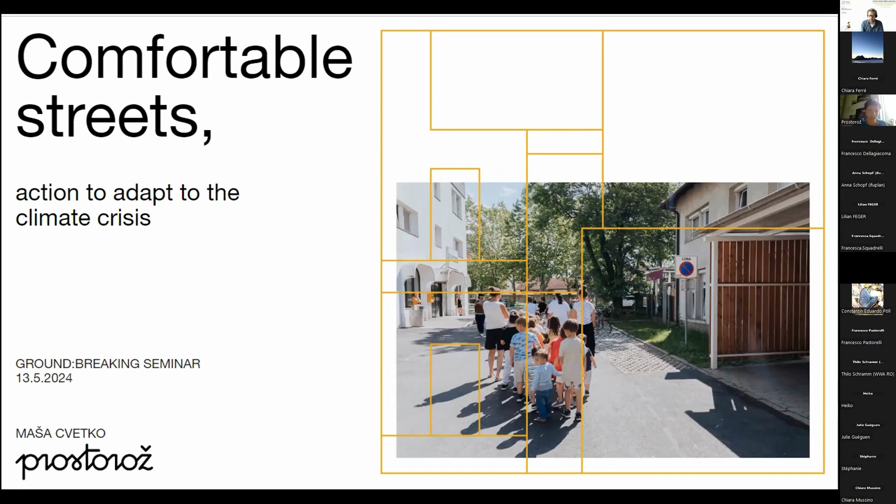It's a concept similar to different typologies of streets that we know from other cities. But what is common for most of these streets is that usually traffic is not really prohibited there, but on the other side, the social life is very intense, so as a pedestrian you feel very safe and comfortable there.

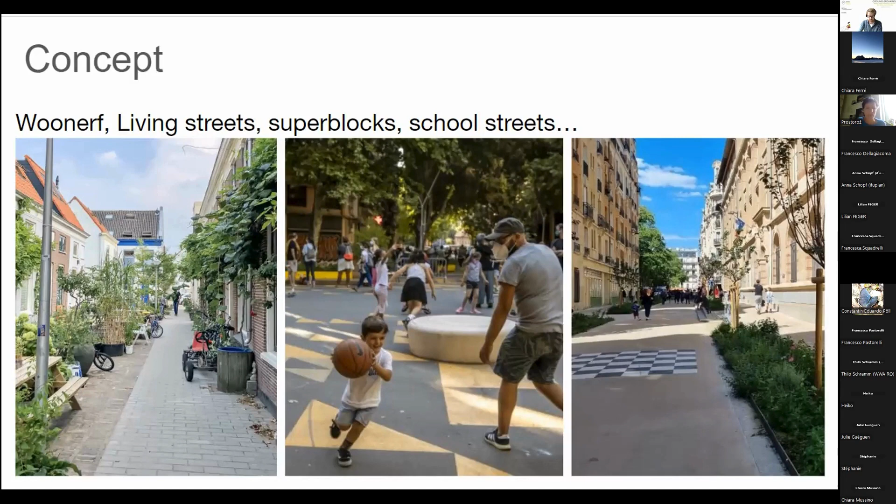You see that the pedestrian is in the first, secure position. So we also put together some criteria for how to plan this kind of street, which I will show through these 2 projects. I will not explain them now, but you will see these criteria.

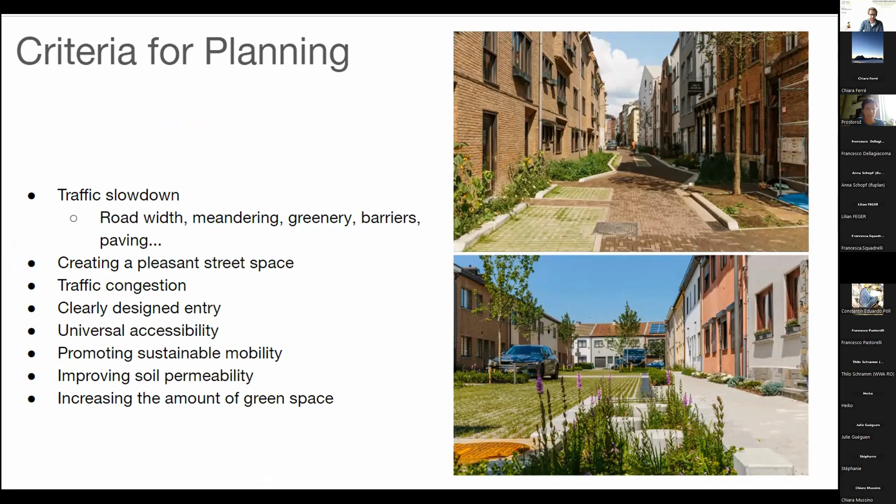But to go a bit back, maybe just to explain how we came to this project or this pilot - as an NGO, most of, or half, maybe more than half of our projects are also financed through different tenders, a lot of them European, but sometimes also municipal.

This project especially was our response to the call from the municipality of Ljubljana, where they were searching for ideas on how to respond to climate change adaptation, so for different kinds of actions.

Our first idea was actually - because it's not a big budget - we wanted to make more of a raising awareness campaign where we would ask people to change 1 parking lot for a green space.

But then when we were going deeper into which kind of suitable spaces would be the most appropriate, and which people to ask to be involved, we realized - because it's such a small area, 1 parking lot - we were also asking ourselves, where would such a small green space make any sense?

Because maybe on a large street full of parking, one green space doesn't mean much. But then on the other hand, if you look at the entrances of different public buildings, we realized that kindergartens are maybe one of these spaces where it really makes sense.

So we went through the analysis, first of all the locations of the kindergartens and what kind of accessibility is there. And we realized that the situation is many times quite alarming - some kindergartens don't even have a sidewalk in front.

At the time of morning arrivals and then departures, parents who bring children by car park really just in front of the entrances, so those children who come by foot sometimes cannot even access it, or those by bike - the bike racks are parked all over.

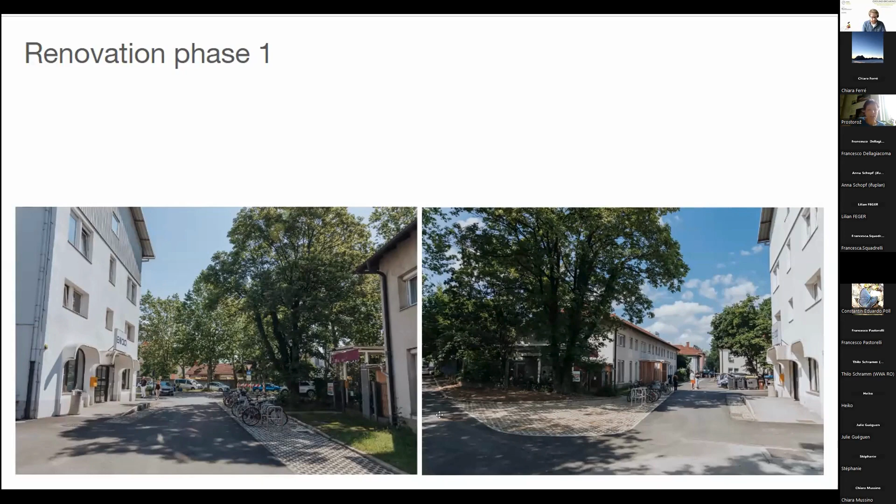So we still needed to do observations—how people come to the kindergarten. There is a post office also on the other side of the street, where people walk, where people leave cars, and what the timings are. So this, in a way, we could do during this summertime.

We did observations, interviews, and questionnaires with parents and with teachers in the kindergarten. On the basis of this, we saw what they wanted, what they preferred to have—more green spaces, more equipment, or whatever. And on the basis of this, we created implementation plans.

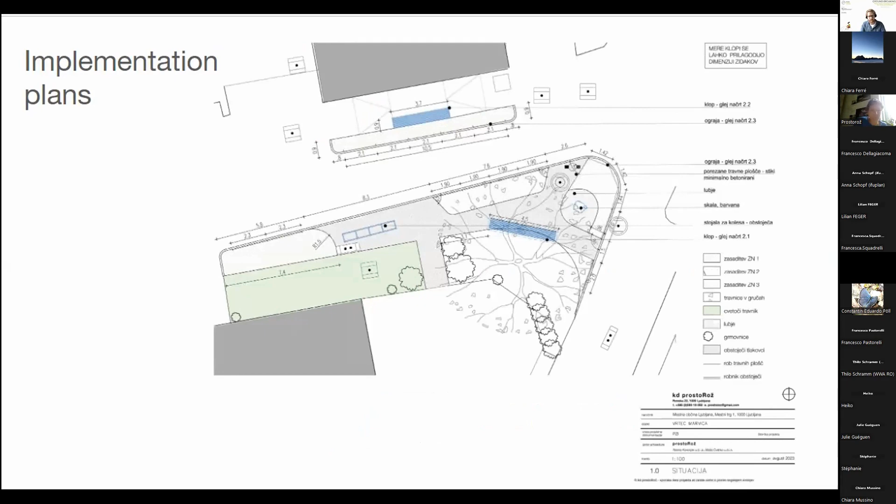And then in the autumn, the implementation also happened. More than half of these pavers were removed, and we planted almost 500 plants. Children were also collaborating in this action. From these pavers, we created two large benches, one for the kindergarten and one for the post office, and we put in bike racks. That was actually all we finished with our budget.

So how we dealt with this project, going through the verification criteria for comfortable streets: we tried to slow down the traffic with widening and narrowing the traffic road, adding greenery. Then we changed the traffic regime. The entrance of the kindergarten was also exposed now, with a bench and bike racks, etc.

We went through this, and we also encouraged sustainable mobility, so it was more pleasant now to come to the kindergarten by walking or biking. And with more permeable paving, we improved the soil permeability, so in case of heavy rains, the water goes directly into the soil.

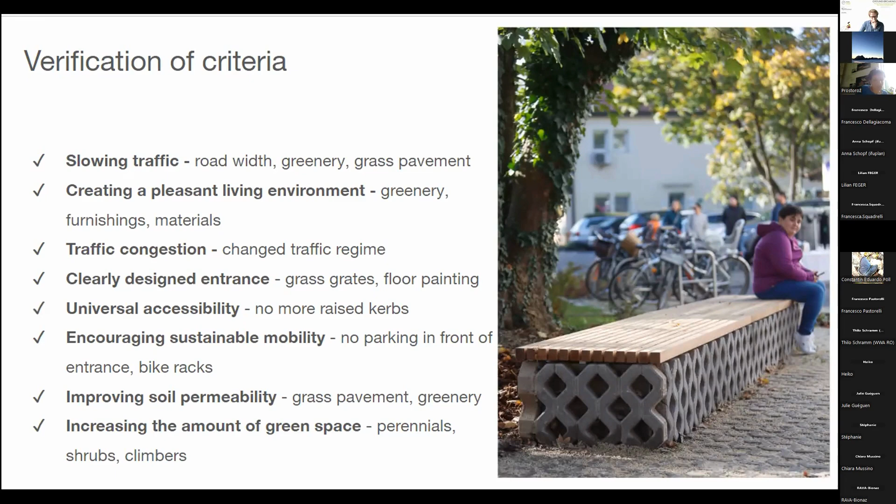This was, okay, one more thing. So what we were not expecting, and it was quite shocking—we realized this situation very, very soon, even before the opening.

So to protect the plants, we had budget only for a very low fence, which was red with red ropes. We hoped that people would see this and that it would be enough. But unfortunately, we did not take into account this kind of driving culture. We are still fighting with the municipality to make a proper fence that will protect these green areas. They are now willing to do it, but it takes a lot of time.

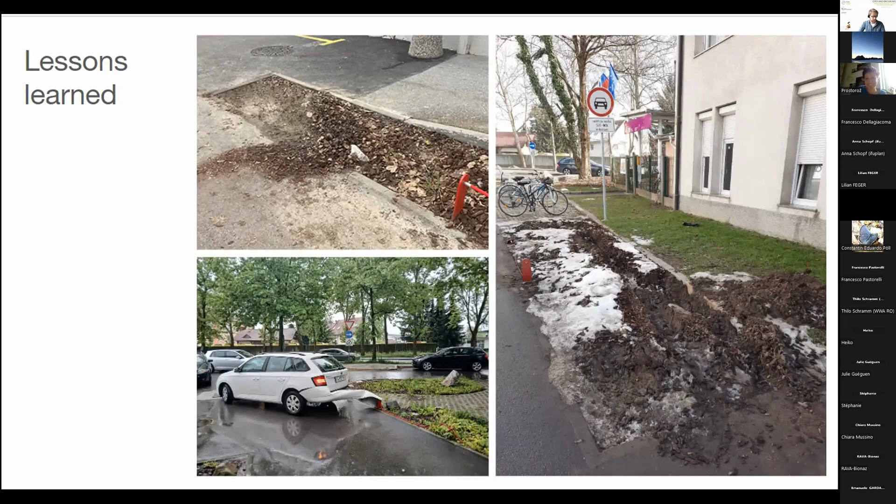So for us, and maybe also for any planners in the audience, this was a very good lesson—to put a proper fence to protect the plants.

This kindergarten, for which the municipality agreed to order implementation plans, was also one kindergarten. You can see this is the entrance—it's again very inaccessible. In front there are full of cars, bikes, and planters. Also on the street, even though it's prohibited to park on the whole street, you have cars on both sides.

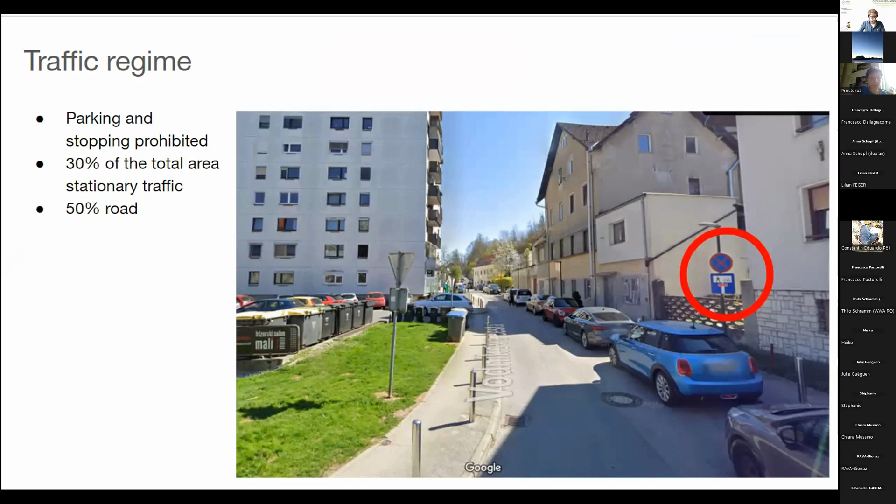80% of total this area is covered, even by cars or by road, which is the same traffic surfaces. So this is the current situation.

So we have only 3% of green surfaces, this small piece of grass. Pedestrian surfaces are 20%, even though people are already now walking in the middle of the street because it is not possible sometimes to access the trottoirs. And the same with water permeable as green spaces.

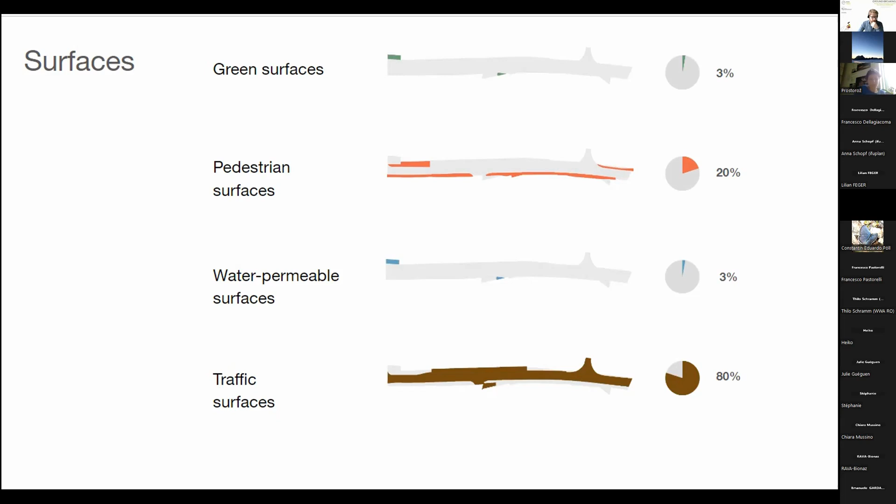So what was our project? The first thing was to remove everything, all the surface layer, and dig as deep as possible. So at least 80 centimeters in the areas where we will put the green surfaces.

So as Chiara was explaining, this was for the reason to improve the soil permeability. And then everything was put on the same level so that there will be no more barriers for pedestrians or cars.

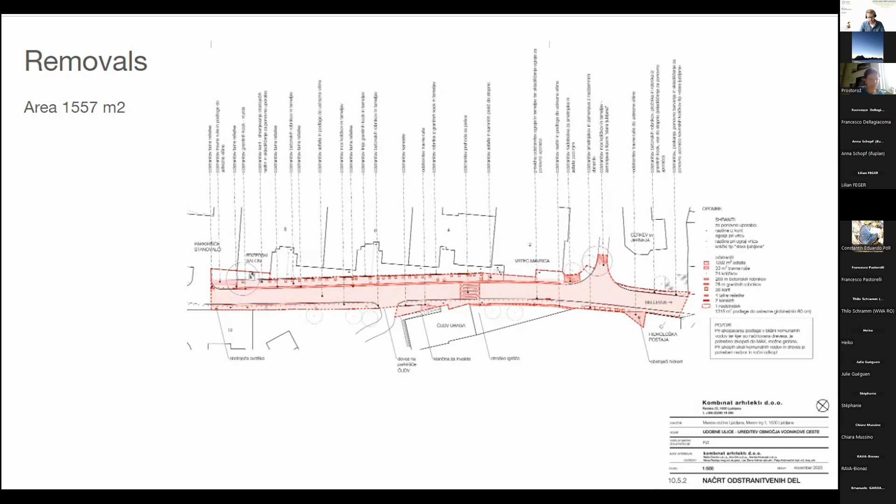So first we cleaned everything. Then we defined where the route for the traffic is going. We narrowed this route to 3 and 3.5 meters, which is necessary for the trucks picking up the garbage. And as you can see, this traffic area went from 80% down to 45%.

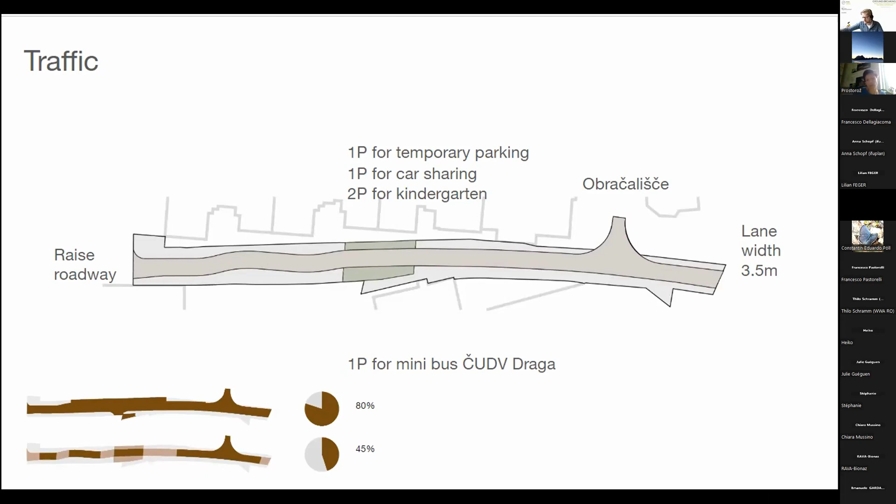We also left a few parking spots for the kindergarten and for an institution dealing with handicapped people. So they need a kind of parking for driving them to other places, and one parking spot for car sharing.

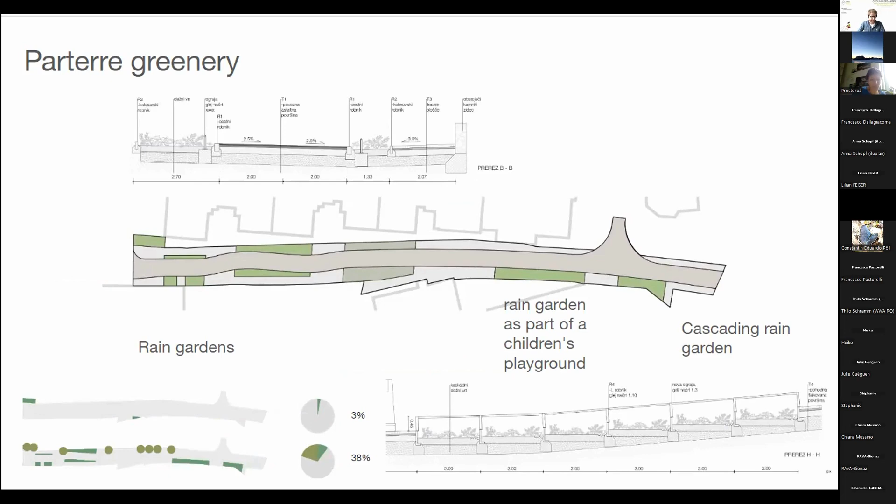So yes, as much as possible space around this street, we wanted to make green, either by creating rain gardens or using grass pavers, so that we get as much permeable surface as possible. Why is this permeability here so important?

So the water from this street, as well as from many others in this area, goes into the big canal sewage system on the main road. And this main road, whenever there is heavy rain, gets stuffed with water. It's full of water, because too much water comes into the sewage system.

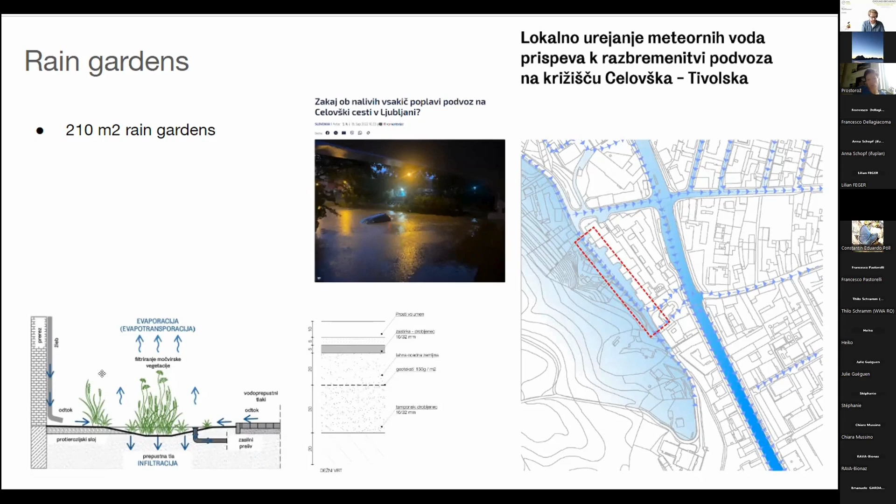And even though this street will not help much on its own to hold this system, if there were more pilots of this kind introduced in the area, we could solve this situation.

So yes, as I already mentioned, on all pedestrian zones we were using permeable pavements where water can still go through. And we were also using these pavers for slowing down the traffic.

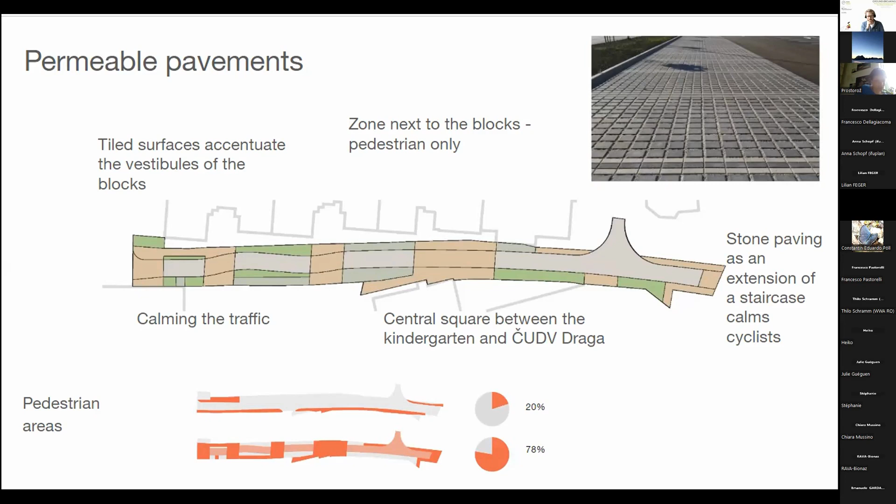So wherever there is an entrance to these high blocks of flats, we created a kind of square, which slows down the traffic and gives pedestrians a feeling of a safer zone. At the end, we also added trees and public equipment.

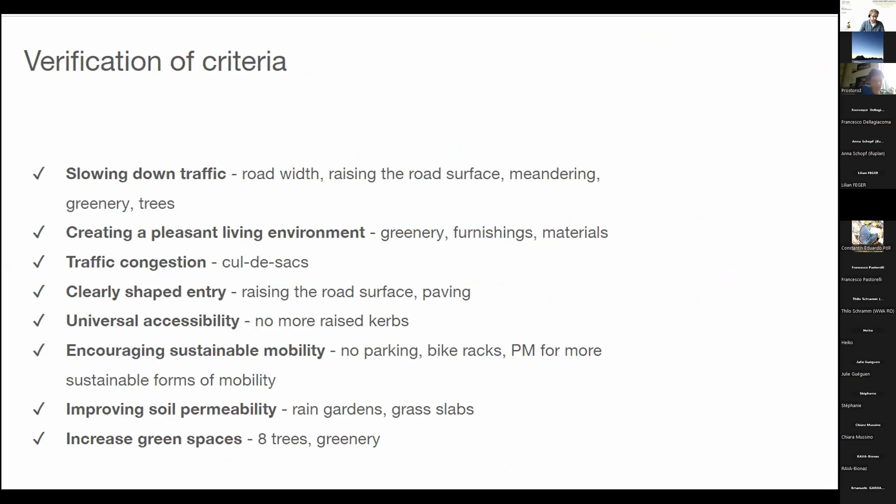Again, regarding verification criteria, I won't go through it, I don't think I have enough time, but at the end you can see how much we lowered the traffic surfaces, and how much more green spaces, pedestrian surfaces, and water permeable surfaces we gained.

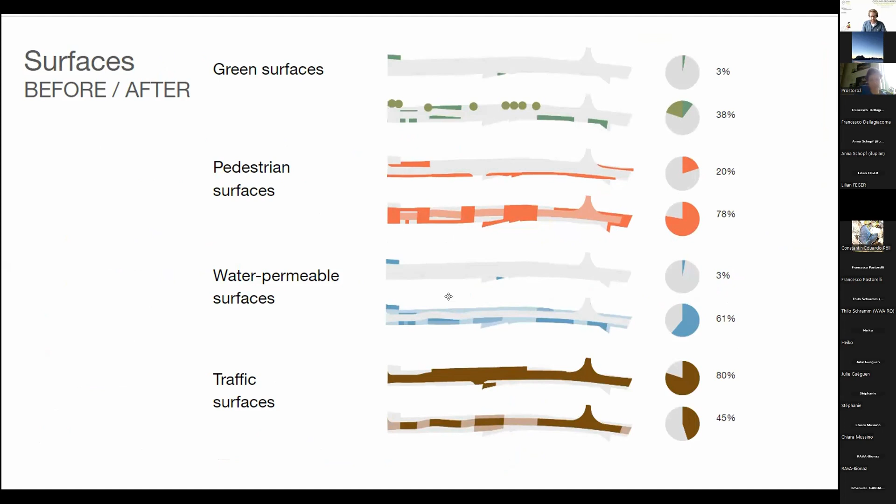So this is still a project on paper. We are hoping that the municipality will go into implementation as well. It's not that easy, of course, as the first one, and for us.

I mean, yes, we can show through this kind of project how street design can play an important role in tackling the climate crisis. But still, we would like this kind of project to become systematic, so that whenever municipalities are renovating infrastructure under the street.

They would implement this kind of principles when creating the new design of the street. But for this, we see that it needs a lot of effort and a lot of education, not only for urban planners and decision makers, but also for engineers and constructors. At the end, it all depends on the political will of city authorities, whether they want to accept this kind of strategy or not.